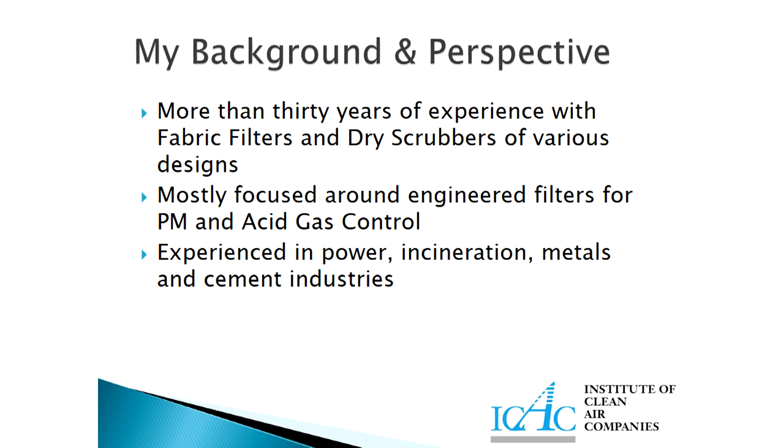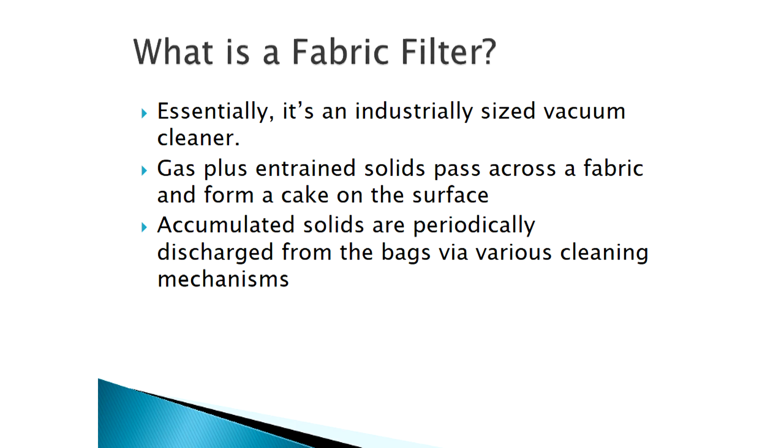What is a fabric filter? Essentially, it's an industrially sized vacuum cleaner. You take the gas containing the particulate and you either blow it or draw it across a fabric surface where the solids are removed from the gas. You collect it on the fabric surface, and then the accumulated solids are periodically discharged from the bags into hoppers through a variety of cleaning devices.

There's a typical fabric filter that my company built for a steel application.

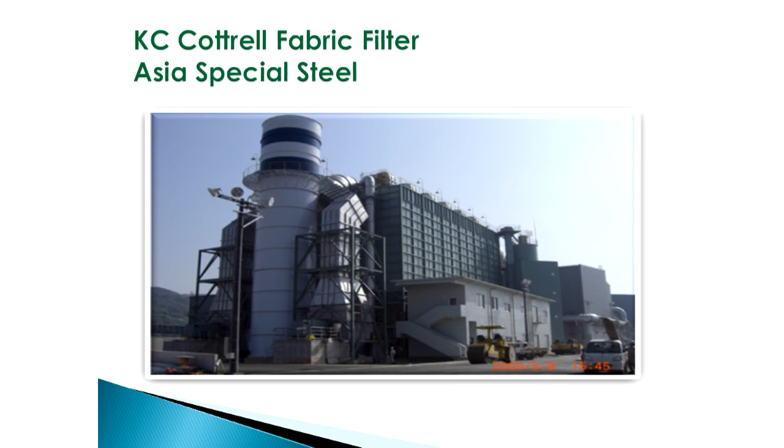Fabric filters tend to be gaining prominence in particulate control versus electrostatic precipitators, and I think John did a nice job describing ESPs. My company also makes a lot of electrostatic precipitators, so we have some background there as well. But the advantage of fabric filters compared to precipitators is the ability to achieve lower outlet emissions in a more cost-effective manner. My ESP guru will tell you that you can make a precipitator get down to just about any emission rate, but the problem is you keep adding treatment time and collecting area, and the box becomes enormous. With a fabric filter, you're able to do that in a more cost-effective fashion.

Another key advantage is filters can more easily accommodate changing inlet conditions. ESPs are very, very specific devices. You design them for flow rates and ash chemistries, and there's an art to making them work correctly. But if you change the inlet conditions, you will change the performance of the unit very easily - change the temperature, change the ash chemistry. For instance, in the power industry over the last number of years, you've seen a lot of operating coal-fired units that were designed to burn high-sulfur coals, with precipitators built for low-resistivity high-sulfur coals, switch to PRB coal.

PRB has a high resistivity ash, and that impacts the performance of the ESP, so that needs to be taken into account. Also, fabric filters have the ability to function as gas-solids reactors, and that's become increasingly important, especially as newer rounds of regulations are not just issued on particulate control. The MATS rule, the MACT rules, contain requirements to remove acid gases as well as particulates. So the back end becomes a combination device, and because of the inherent gas-solids contacting, the filters function fairly well as reactors, either as primary or secondary reactors.

The disadvantage is you will take a higher pressure drop. Where an ESP, typically flange to flange, you're looking at a 1-inch pressure drop, with a fabric filter you're looking at 6 to 8 inches flange to flange, typically. So you will take a higher pressure drop, more energy consumption, and you have temperature limitations.

The interior of an electrostatic precipitator is typically all metal, so you can take changes in temperature, you can take higher temperatures. There are hot side electrostatic precipitators that operate 700 plus degrees. In a fabric filter, you're limited by what the bags can take, and typically right now, with fabrics, that's probably a continuous operating temperature in a range of 500 degrees Fahrenheit. So in a power plant, it forces you to the cold side of the air heater.

And if you've got processes that are subject to having sparklers or sparks carryover, that's a problem for the bags - bags burn, and they don't work well when they burn. Whatever material you put in there as a filter media is going to have to be changed periodically. Bags last, depending on the application, probably somewhere in the range of 2, 3, 5 years, more or less. There's data out there that goes outside that span, but you will have to eventually change the bags, so that needs to be taken into account.

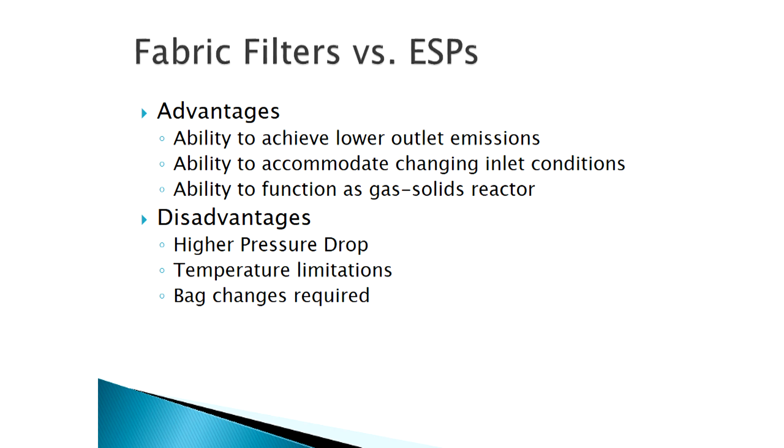There are lots of types of fabric filters out there used for all different applications - smaller ones, standard catalog filters, cartridge filters that are typically used for nuisance dust control. If you're venting a silo or you've got a transfer point, things like that, your dust is going to puff and you want to collect that so you don't have a fugitive emission.

My background is more in process filters, treating flue gases, kiln gases, metals, furnace gases, that type of stuff, and I'll talk more about what's going on there today. There are also some other things going on.

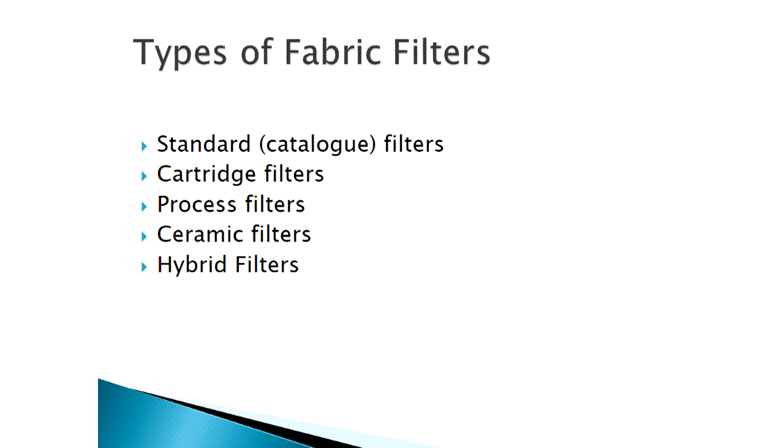There are hybrid filters, COHPAC type devices that are half precipitator, half fabric filter, useful in certain retrofit applications in particular, taking the best features of both technologies and combining them. There are also ceramic filters - the filter media doesn't necessarily need to be fabric. There are more exotic materials out there that allow you to operate at higher temperatures. They've got their pluses and minuses, so I'll touch on that.

For process filters, there have really been two common fabric filter designs: the reverse air units, or reverse gas units, where the dirty flue gas flows on the inside of the bags. Solids are collected on the inside, and clean gas goes to the outside, exhausting to the stack.

They generally have filtering velocities, or air-to-cloth ratios, in the range of 2 cubic feet per minute per square foot of collecting surface. This filtering velocity, as many of you know, is a key sizing parameter for filter performance. Bag diameters typically range from 8 to 12 inches.

Bag lengths as high as 36, 39 feet. You have to hang these bags individually, so they tend to take up a lot of room - they've got a large footprint. And they're typically field erected, which means when you're putting one of these things up, there's a high labor component to putting it together. They're shipped knocked down, and you have to assemble them in the field.

What's developed now, more commonly, are the pulse jet units, where the dirty flue gas flows on the outside of the bags. Particulate collects on the outside, the clean gas flows through the inside and exhausts.

Those bags have to be supported, obviously, so they don't collapse. You can operate with higher air-to-cloth ratios, roughly 50% to twice what you can with a reverse air unit. That means less total bag area, fewer bags, and smaller space.

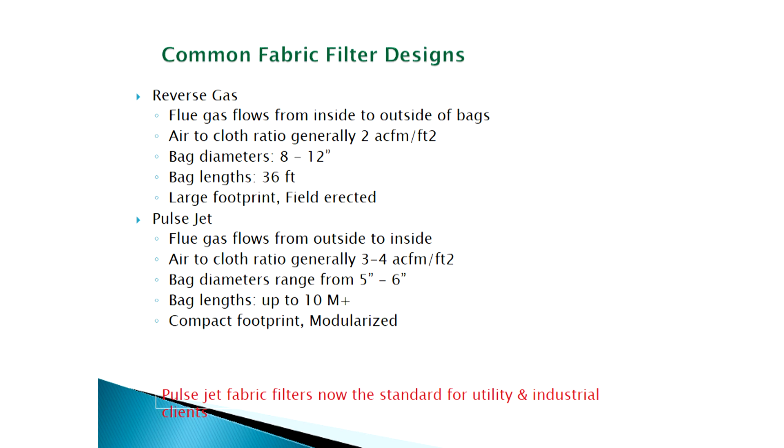So they have a more compact footprint, and in many cases they're modularized. You ship the whole module - you can shop-assemble a whole module, the tube sheet down through the hoppers, bring it in, drop it in place, put the bags and cages in, and hook up the cleaning system. So it really cuts down on the field erection time and the costs associated with that.

So pulse jets have pretty much become the standard for many industries now. Some of the recent trends we're seeing in fabric filters are this low pressure, or medium pressure pulse - a lower pressure, higher volume pulse that allows you to effectively clean a longer bag length. So it allows you to go to the long bag design.

The use of online cleaning is also important in a couple of areas. It tends to levelize the effect on the fan - you're not taking compartments out of service to clean.

Typically a filter is always sold, a process filter is always sold with the provision that it can operate with at least one compartment out of service for maintenance. So if you have to clean offline and you've got to take a compartment out for cleaning and a compartment

out for maintenance, it makes the overall filter size fairly large. If you can clean online, this way you only have to take one compartment out for maintenance, again, it makes it a bit more cost effective.

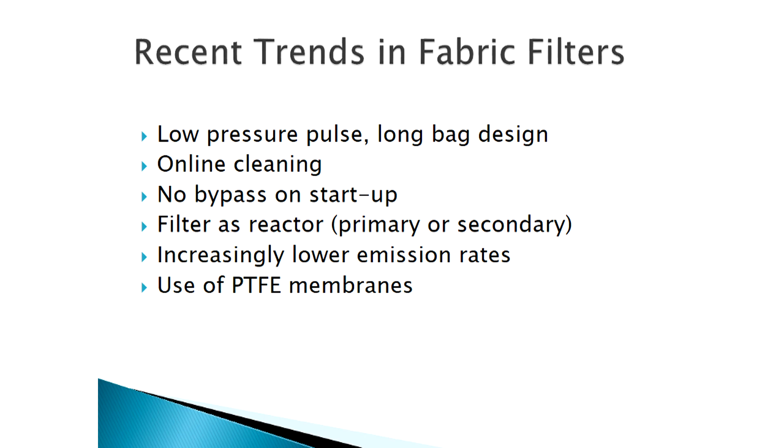So they have that benefit. Again, we're seeing increasingly lower emission rates required for filter performance, and that has led to a more widespread use of PTFE membranes on top of the bag material itself to help ensure that emissions are lower and lower.

So pulse jet filters, typical device today. The tube sheet's at the top, the bags are hung from the tube sheet. They're supported by internal cages because the gas is flowing outside in, so you don't want the bags to collapse, so you've got a bag with a cage inside of it.

Most people, including ourselves, will use circular bags. There are other designs out there - other people use pocket bags, but most filters will use circular bags arranged in arrays. As I said, longer bag lengths are becoming more common - 7 to 10 and even more meters in bag length.

The bags now tend to be cleaned in those applications by a pulse of clean, dry air, dropped down to 50 pounds or less with a higher volume per pulse. And you can do online cleaning, although with every filter, you can inevitably take a compartment offline and clean it down.

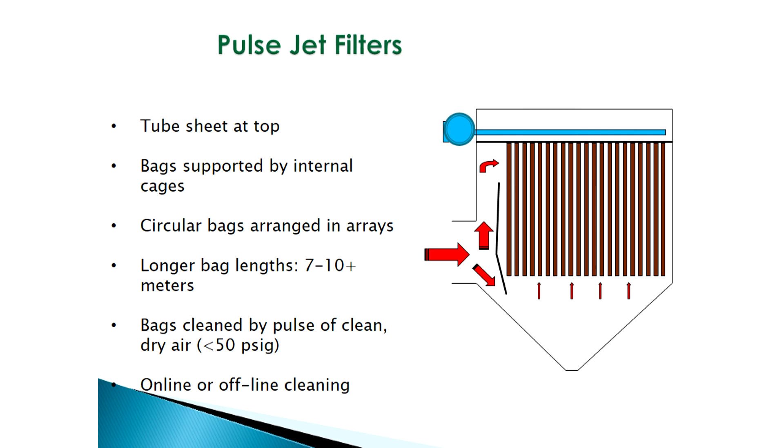That's typically done, for instance, before you change bags. You'll take the compartment offline, knock off as much dust as you can to make the bag change easier to do. The bags are loaded from the top.

You see here folks putting the bags in - you take the bags and put them in the tube sheet. There's usually some sort of snap band or other attachment mechanism. So the tube sheet supports the bag, and then you go ahead and drop the cage inside the bag.

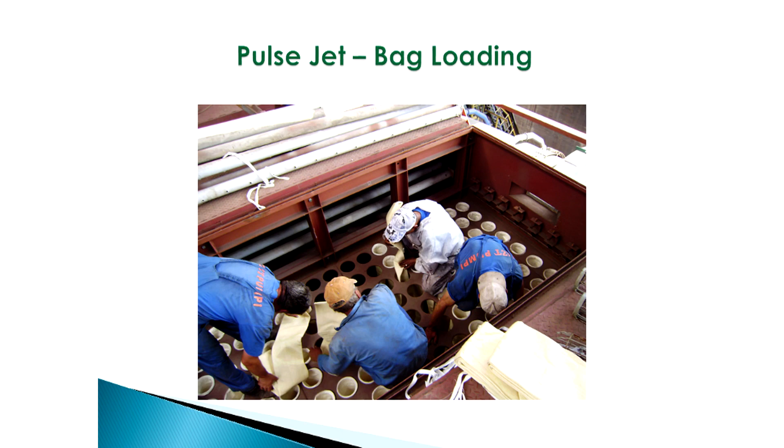And with the longer bag lengths, multiple piece cages have become more and more common. If you've got an 8-meter bag, you don't want to handle an 8-meter cage.

The bag you can let unfold, but the cage has to be stood up, and plenums and roof enclosures have to be higher. So you tend to go with multiple piece cages that have some sort of connection mechanism.

Cleaning systems - you've got a header with compressed air, which then, depending on the cleaning mechanism, releases the air into each row, and you can clean down each row. With online cleaning, you're not just cleaning one compartment.

You would typically - let's say if it's an 8-compartment baghouse - clean the first row in one compartment, then the first row in another compartment, so forth and so on until you went through all 8.

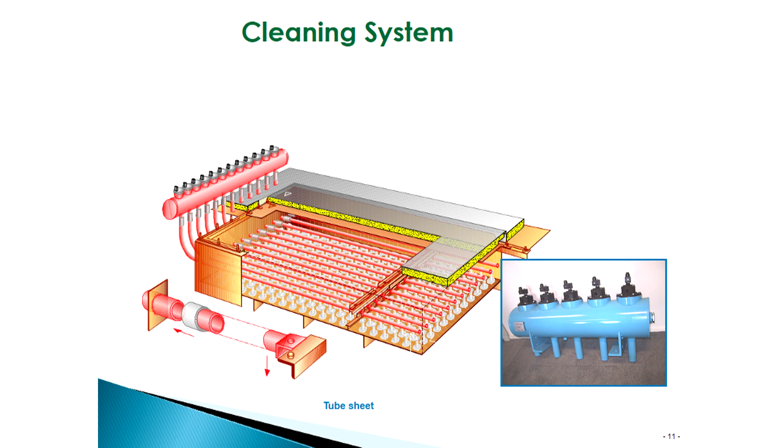Again, it tends to make the operation smoother, and in cases where you're relying on the filter for a reaction, that's important because you maintain the cake on the bags, and it helps smooth out the acid gas removal.

Factors that affect the performance of a fabric filter - well, obviously the inlet gas conditions. The chemistry, the temperature, moisture content are important. The filtering velocity, or air-to-cloth ratio, which is basically the ratio of the volume of gas you want to clean to the square foot of bag material.

or media material that you have, is sort of the key design parameter for sizing fabric filters. The can velocity - how much of the gas is going to go upflow in the filter itself and re-entrain any material that could be cleaned off.

Gas distribution within the filter itself, in terms of making sure you evenly distribute gas within the various compartments, and within each compartment adequately across all of the bags, because you want to make use of all of the available surface area. So it typically involves a lot of modeling, almost always CFD modeling.

Occasionally we still use physical models to do that. The nature of the incoming particulate, the amount, the size, the chemistry, in particular the chemistry, because it can affect what can happen in the bags. Whether you have material that is subject to spontaneous combustion in certain metals industries can be a factor. The distribution of the particulate, the particle size distribution in terms of rocks versus inhalable particulate.

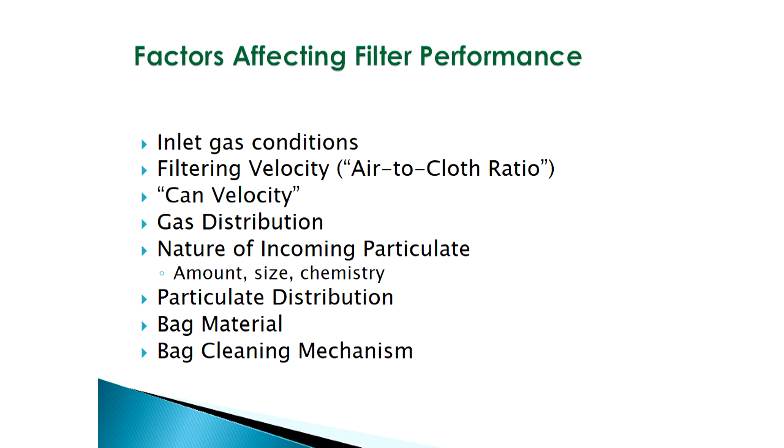So you have to look at what bag material you choose and how you clean the filter down. And then typically we'll go back into our caves and come back and say, with all of that, we suggest or recommend that you use this filtering velocity and these numbers of modules or compartments, and here's the configuration. Typically it's either inline, or there's a header down the center that distributes it to 2 rows of compartments.

Here's the bag configuration that we think you need, so many bags, this bag length. How we design the inlets, and I'll talk about that because it affects the performance of the filters. Whether you come in through the hopper and go up, or whether it's typical now with the long bag lengths, you come in from the side and use a distribution plate to distribute the gas and particulate, not all to the bottom, but across the bag surface itself. How you do the cleaning, what the tube sheet looks like.

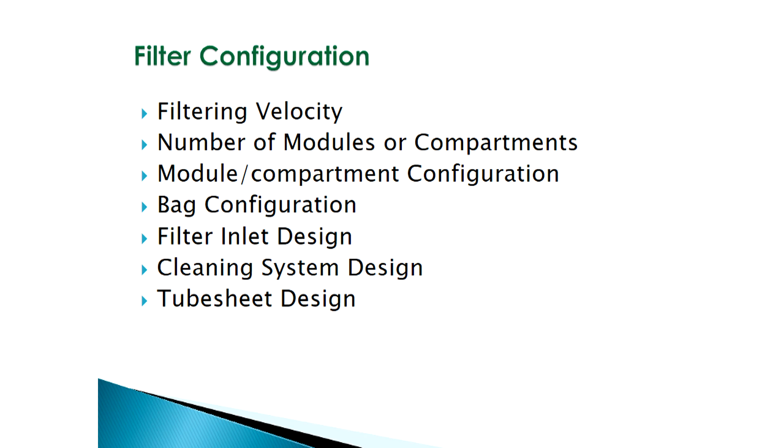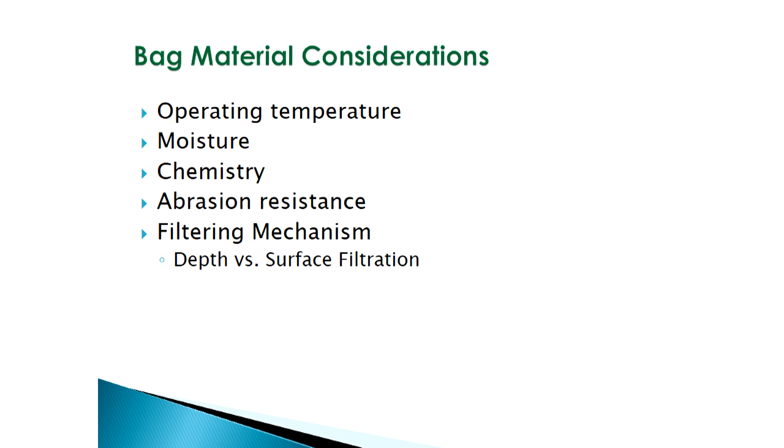Bag material considerations. A lot of operating conditions affect what you can use for different types of materials: temperature, moisture, chemistry, abrasion resistance, the filtering mechanism itself. If you use a woven bag or a pure fabric, you tend to have depth filtration. So in essence, you're building up a cake, and a lot of the filtration occurs because of the cake that's built up on the bags. It's a little different than if you use a membrane. If you put a membrane layer on top, you have more of a surface filtration, less affected by the depth of the cake and that sort of thing.

Common fabrics that are in use in different industries: polyester, acrylic, Nomex, PPS used to be Ryton, now it's polyphenylene sulfide, something like that. Fiberglass, and PTFE. And the PTFE can be used either as a membrane on top of one of these other materials as a substrate, or in certain applications, certain cement kilns will use pure PTFE bags. It's PTFE on PTFE, so those are pricey bags. You want to make sure you treat them right, but they're very, very effective in what they can do.

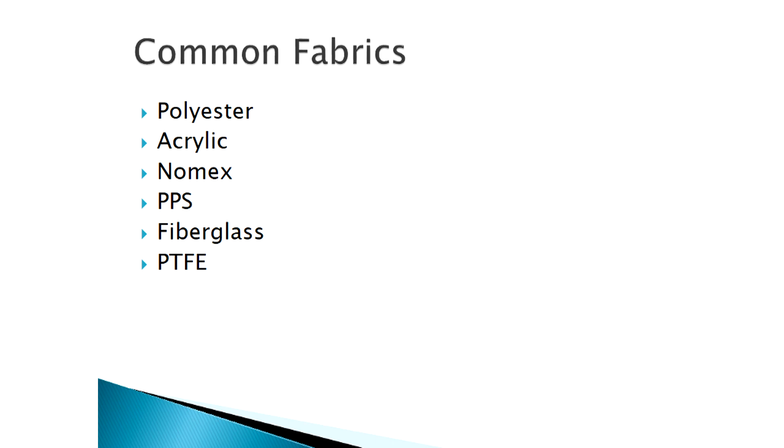There's a whole range of factors you can look at, depending on temperature, chemistry, moisture and so on, which materials make sense. If you look at the column that says temperature ratings, you'll see that for fabrics the highest continuous temperature rating is about 500 degrees Fahrenheit, and that's fiberglass. So you're kind of limited there. If you've got a process with a higher temperature, you're going to have to control it before you go into a fabric filter, or use a non-fabric medium.

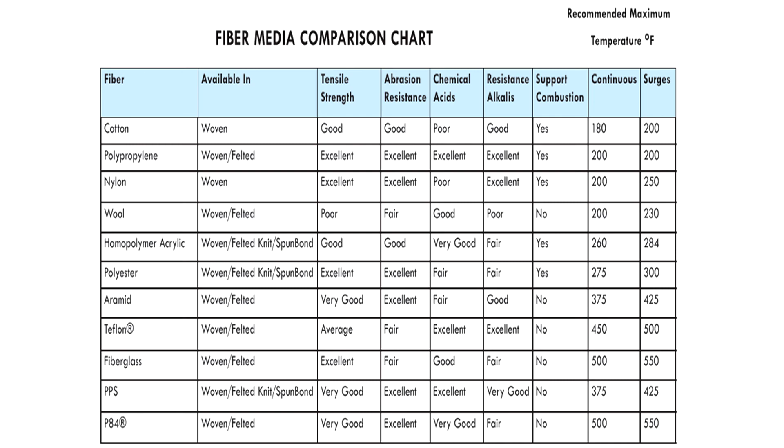Designing filters for extremely low emissions is becoming more and more common for us. We're seeing the emission limit requirements go way down. We end up looking at the filtering velocity and maybe going with a lower filtering velocity than we would in other cases. That means a bigger filter. A lot of attention we pay to the gas distribution. Again, coming into the various compartments and within the compartments, we want to make sure that not only are we using all of the surface area, but we're not creating any problems.

Typically with these long bag designs, you're hanging a bag maybe 10 meters off a support point. If you don't distribute the incoming gas and particulate correctly, you can create a wind chime effect. The bags will swing, they rub together, they rub up against the internal stiffeners. They start to weaken at the tube sheet, and you get premature bag failure because of the abrasion that occurs, either at the top or where they're bumping up against other bags. Particulate distribution, minimizing any re-entrainment.

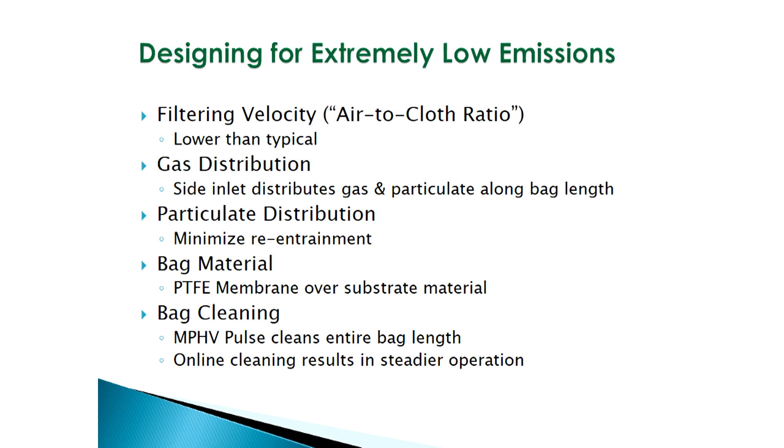Typical for very low emission rates now, we'll go almost all the time to a PTFE membrane. The bag cleaning mechanisms are again very important. You've got to have dry air, got to get the right pulse introduced, and you have to make sure the pulse goes down the bag straight. You don't want the air jetting off to the side, or you're not going to get an efficient cleaning mechanism.

There are some other more exotic devices out there from time to time, hybrid devices, COHPACs essentially, a combination of an ESP and a fabric filter. We've done them, for instance, in cement kiln retrofits where somebody had a 4-field ESP with very high dust loading coming in and wanted to drop the emission rate. We keep the first couple of fields as functioning precipitator fields because you're knocking out a high percentage of the larger diameter particulate coming in at a very high rate. So we reduce the loading on the last two fields, which we convert to fabric filters, and get a very low emission rate using fabric filtration on the back end. If you were to stick with an ESP, you'd end up adding fields to get there, so this is another way to do that.

It doesn't work in every application, but there are certain applications where it works.

Ceramic filters, again, are specialized devices. They allow for high temperature operation using ceramic candles, and the candles can be impregnated with catalyst, so you can turn them into not only particulate control devices but reactors as well, used to control NOx, dioxin, furan emissions, that sort of thing. One of the problems with ceramic candles is they're fairly heavy, so you end up limiting the length of the candle, which means you build out wider and get a bigger device. But for certain applications, particularly metals applications where you're recovering a very valuable commodity like platinum dust, it's a good way to go.

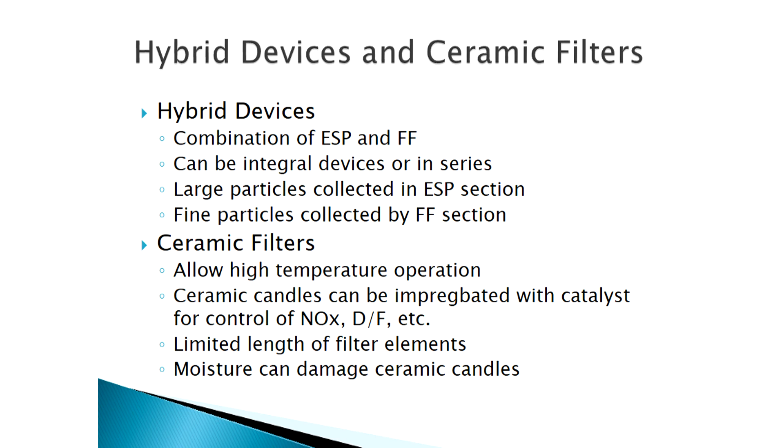This is the hybrid precipitator fabric filter I was talking about, one unit that we did. This was at a cement kiln, which I just talked about.

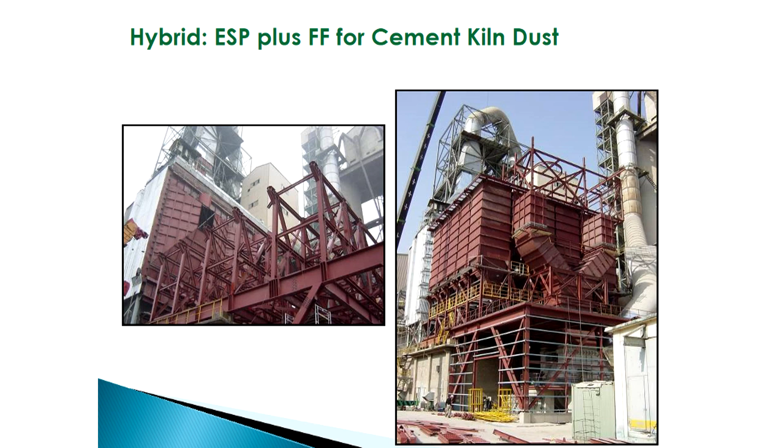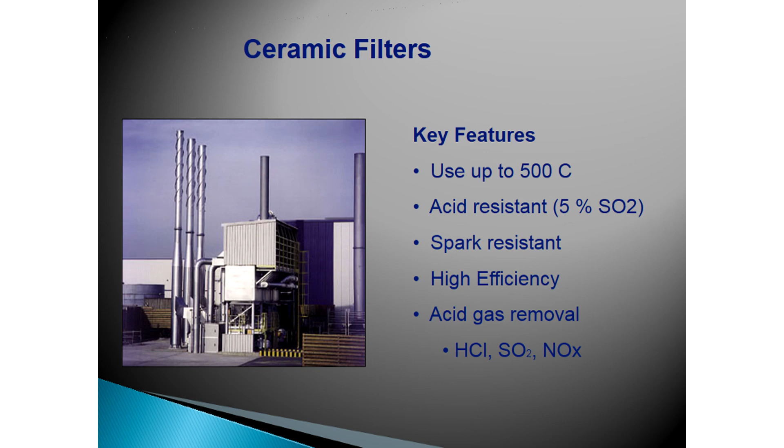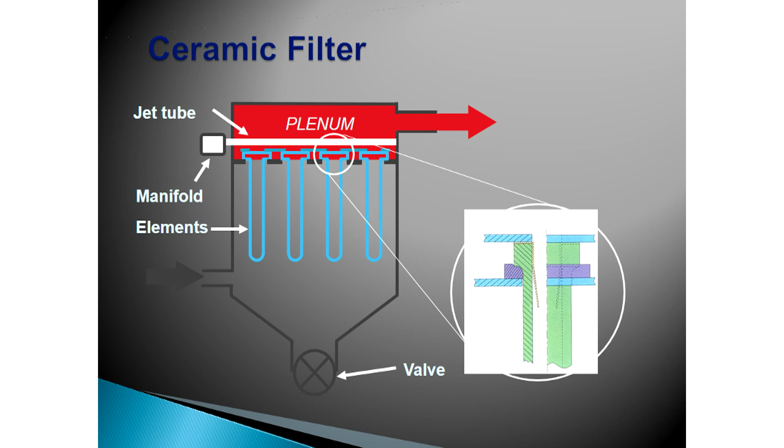The ceramic filters can go up to 500 degrees C. You get high temperature filtration, they're acid resistant, spark resistant, very high efficiency, and get acid gas removal, so they definitely have some benefits in certain applications. As I said, there are some limits to them. They look a lot like pulse jet filters - you've got the elements hanging off the tube sheet - but because these are ceramic elements, the tube sheet becomes not inconsequential, and typically you're limited to about a 3-meter bag or element length in this type of application, so it can make the filter a lot bigger.

There's just a shot of this. This, I believe, was for a glass furnace application.

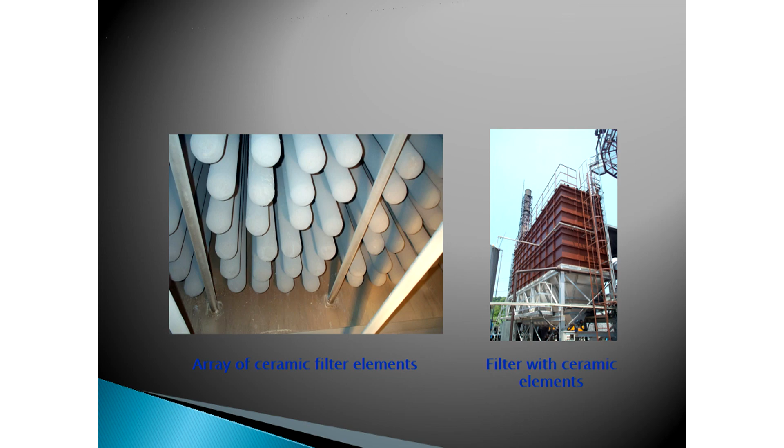In the agenda, there was one specific question or comment about baghouse technology followed by wet ESPs for lead control. I have no experience with that specific configuration, so I don't know that I have anything meaningful to add there. I would be curious to know what application that was for. I don't know if the person who wrote the comment is in the room, but I'd be curious to know what that's for.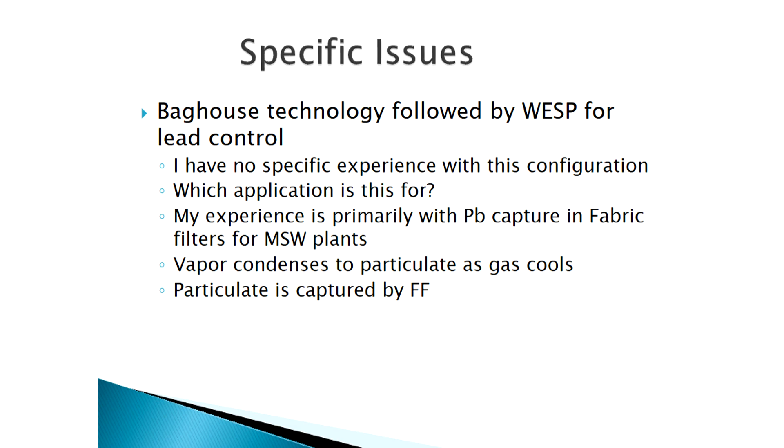My experience with lead really comes from incineration plants, where lead is regulated as a pollutant. Typically it's controlled in the fabric filter by the reduction of temperature. It doesn't really condense, I guess - I'm not sure what the opposite of sublimation is - but it goes from vapor to solid and gets picked up on the bags there. So I'm sorry I can't provide a lot of background on that specific issue.

And that's it. Thank you for your time, and I'd be happy to answer any questions.

I know we're running a little bit behind schedule, but yes, sir.

Question: on a pulse jet, does the pulse of air go through the center of the bag and force the dust off on the outside, or does it kind of go down the side and scrape it clean? No, you want the pulse to go down the whole way and create a pressure profile that will push the dust off the bags. You do not want the pulse directed specifically at the bag.

You want to make sure the pulse goes down straight, and certain designs will use venturis to introduce the pulse and help align it, because if the pulse hits the bags, you're going to get premature wear, and it won't ripple all the way down the full bag length, specifically with the long bags.

Yes, sir? There's probably a lot of variability in the answer, but how often do you pulse down those tubes? Like once an hour, once a day, once a week?

That depends on the process, and it depends on how you set the cleaning mechanism itself. In the old days, what you would do is set it on a pressure differential. So when the bag had been cleaned down, you might look at a pressure drop, say 6 inches across the tube sheet. You would allow the cake to build up and initiate the cleaning cycle when it got to, say, 8 inches, then clean it back down to 6. So you'd end up with this sawtooth pattern of pressure drop - allow the cake to build up, knock it down, allow it to build up, knock it down.